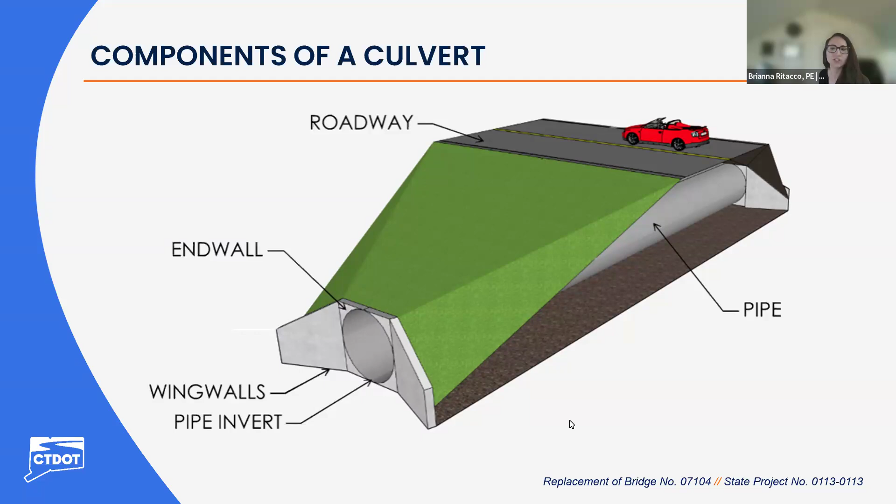At this time, I will turn the presentation over to Tom Beckman from BL, who will discuss the existing condition of the bridge and the proposed design and scope of work.

Thank you, Brianna. Our existing bridge was constructed in 1955, and it consists of a 100-foot long, 72-inch asphalt-coated corrugated metal pipe. Route 165 in this location consists of 12-foot vehicle travel lanes with 8-foot shoulders in each direction. Both sides of the roadway at the bridge location are protected by guide rail, and there are overhead utilities along the north side of the road. Approximately 4,200 vehicles per day use Route 165, based on the 2024 Connecticut DOT counts.

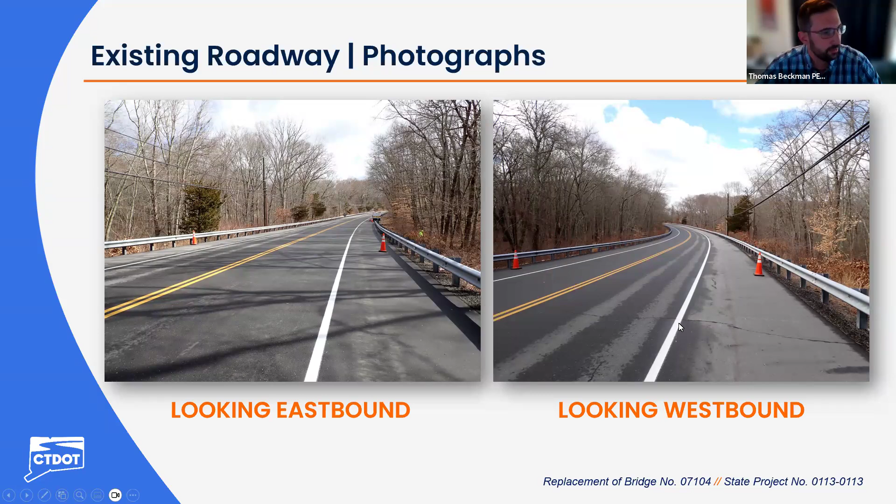Project purpose and need: based on the March 26, 2025 inspection report conducted on the structure, the pipe is in serious condition. This is due to the asphalt coating missing with heavy laminar rust, thinning of the steel with perforations, as well as a sag in the middle of the culvert. Additionally noted is a crack in the concrete headwall.

So we'll go through a couple photos here showing you that condition. Top right, we can see that crack in the headwall right through here. That is something to be addressed.

Bottom left photo is our culvert. You can see along the water line here where that nice black coating on top of the pipe is removed, and you can see rust through there. That is typical through the culvert section, and difficult to see, but there is a minor sag in the middle of this pipe here.

And then that final photo on the bottom right is looking at one of those thinning locations that resulted in perforations into the steel pipe. So that is some of the condition which is going to be addressed by the project.

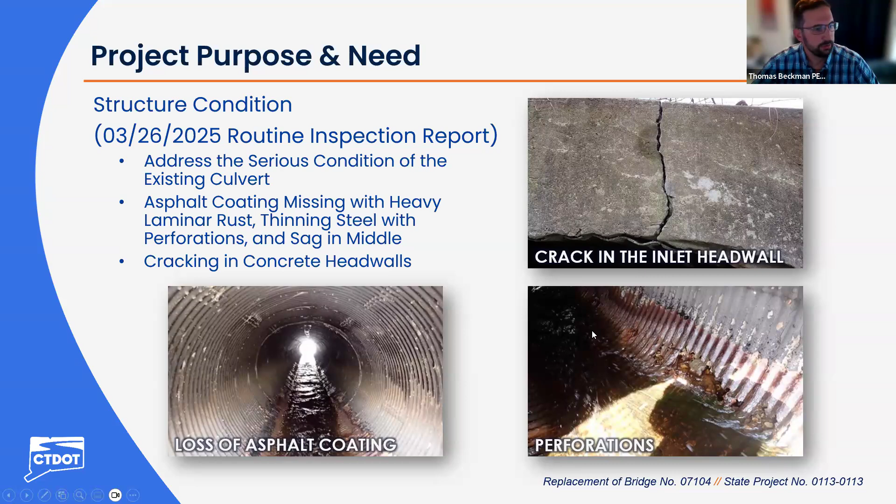Our proposed project is going to be replacing that existing corrugated metal pipe with a box culvert. As such, there are some differences in the components from those introduced to you before, and we're going to take the opportunity to go through those here before we get into the design.

Now we have the elevation view. This is similar to some of those photos where we're looking at the inlet, looking north towards Route 165 in the background. You can see we have our nice wide 18-foot by 7 box culvert here, which is going to convey our watercourse. We have our wing walls, our head walls with some fencing along the top of those.

These are sunk into the ground, which is going to allow us to bury that structure, helping convey the watercourse there, but also allow for that natural stream bed material, shown in purple here, to be installed through the culvert.

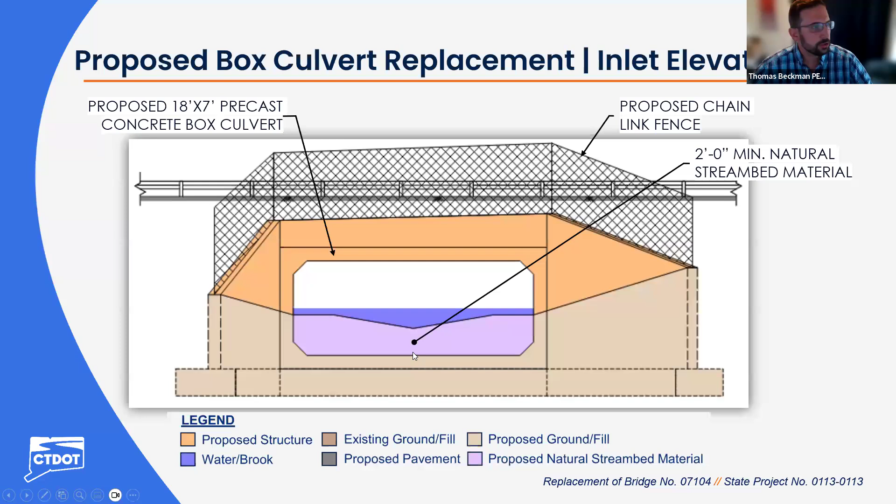How is this going to be constructed? The contractor will create access roads to allow access from Route 165 above to the water course below, at both the inlet and outlet locations, requiring opening of the guide rail along westbound Route 165, where temporary sand barrel protection and anti-tracking pads will be installed to keep sediment off the roadway and access road.

This access will allow the contractor to do the majority of the work on the waterway below. Ultimately, the project will require a short detour of approximately 2 to 4 weeks to allow for removal of the existing culvert pipe and installation of the new box culvert.

This detour has been coordinated with representatives of the town, emergency services, and the school district. It runs along Route 165, to Route 2, down to Route 164, and back up to Route 165 to the project site. It is a 13-mile detour, and it has been coordinated with town officials.

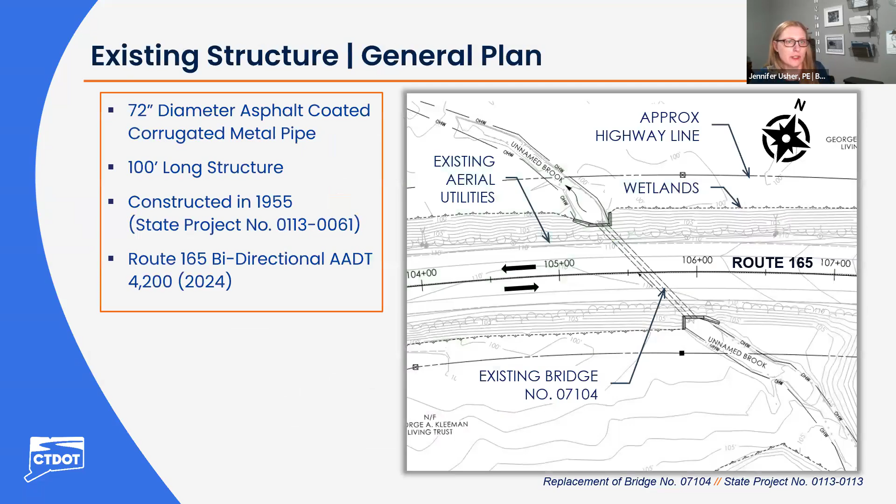Okay, so it looks like we have our first question. Douglas Fox is asking, what are the properties that we are assuming will be affected with regards to ED? I'm assuming he means eminent domain. Let's see who would be the best person to take that question. I'm going to hand that over to Thomas Beckman with BL Companies.

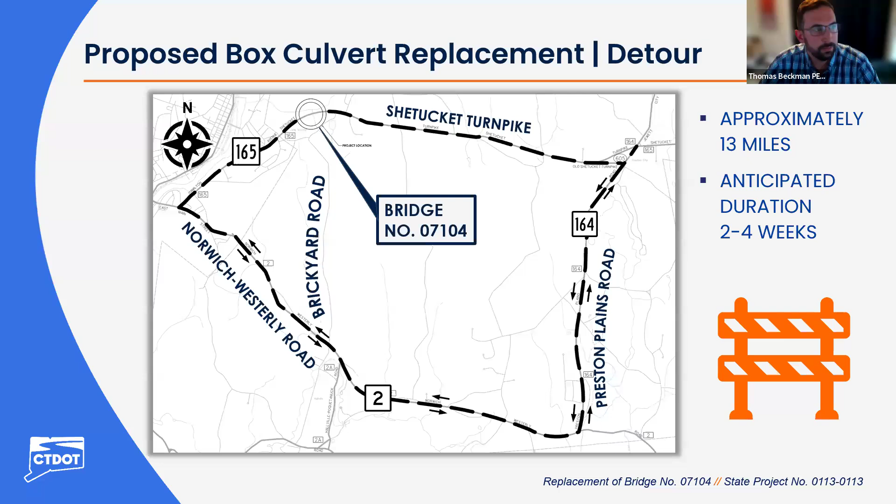I'll add a little bit to Tom's response. Tom, is the existing structure hydraulically adequate today? It is, yes. So we're just maintaining that hydraulic adequacy under Route 165 with the box culvert, but giving a little bit more width, which is more of an Army Corps requirement.

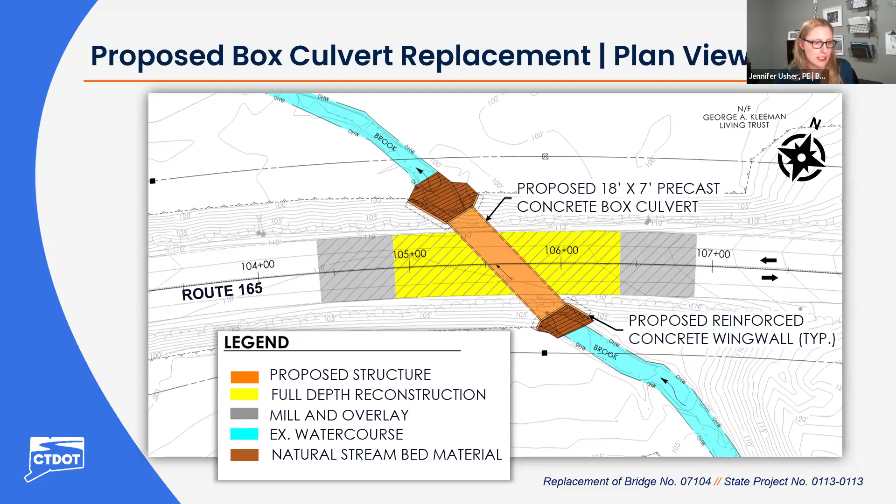We have another question coming in from Douglas Fox, asking: I understand that additional signage would be added to Long Society Road. However, this is not going to prevent 4,300 vehicles from using the shortcut. Are there additional plans to enforce this?

So I think I'll take the beginning part of that question. Again, Douglas, we've been working with the town, and I think really what the state can do is sign the appropriate detours. Of the 4,300 vehicles in that daily traffic, some of those are commercial, non-local traffic, so they're more likely to follow the signed state detours. It's really going to be more of the local traffic. The town was pretty adamant that they would work with the state to prevent Long Society Road from being used as a thoroughfare during this closure.

I don't know if Brianna or Tom or anyone else wants to add to that. I can add that the approaches into Long Society Road are definitely not convenient for large vehicles, as Jennifer stated, so that state detour is going to keep those large vehicles off Long Society Road. When the project goes to construction, it's going to be with Connecticut DOT's district, and if there are any issues during construction, the district would be the ones handling that. There's not to say there wouldn't be changes during construction should traffic become cumbersome — there's always an option to bring in town or state police to help alleviate any of that traffic. But at this time, we're hoping the signage will take care of it.